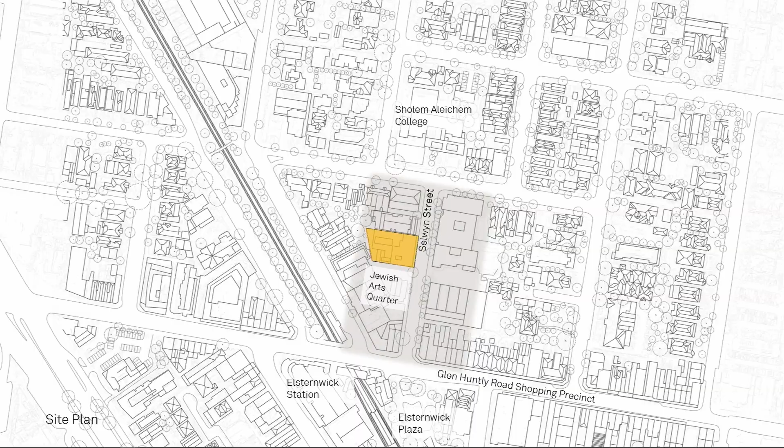The building is located within Glen Eira Council's cultural precinct, with Selwyn Street soon to be pedestrianised into a public space. The project has undergone a lengthy funding, design and approvals process before starting construction in 2020, and will be open to the public mid this year.

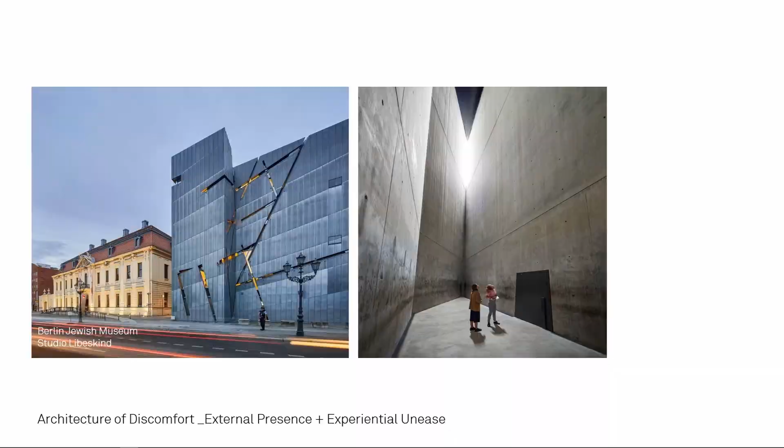Since project inception, we have considered the position of the MHM in the context of international approaches. For instance, Studio Libeskind's Jewish Museum Berlin is remarkable for its foreboding presence and experiential unease for the works. But what does it mean to build a Holocaust museum in an Australian context?

We decided that the appropriate response here is to provide a humane building that enables the survivors, their descendants, and the museum content to speak of the unspeakable, rather than the architects or architecture.

The Holocaust Museum holds a union of opposites: grief and faith, loss and hope, adversity and survival, solitude and fellowship. The architecture articulates these tensions between opposites in the creation of spatial ones: compression and relief, silence and vitality, openness and concealment. Mass is dissolved to let in the light.

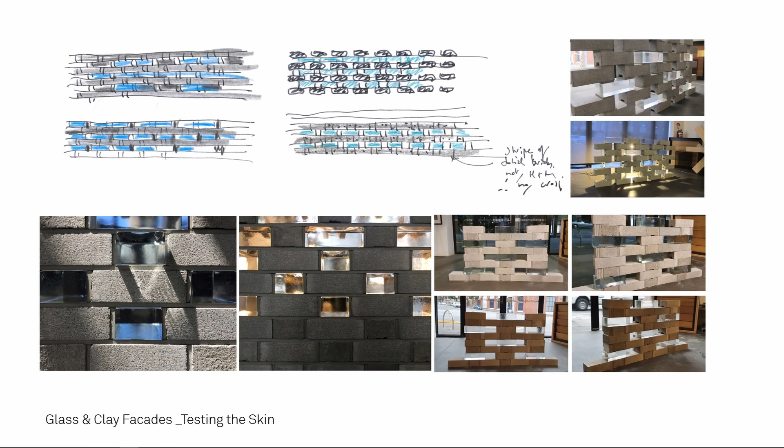The materiality of the museum facade is clay bricks and glass bricks woven together. This presents as another meeting of opposites: strong and gentle, robust and delicate, opaque and open.

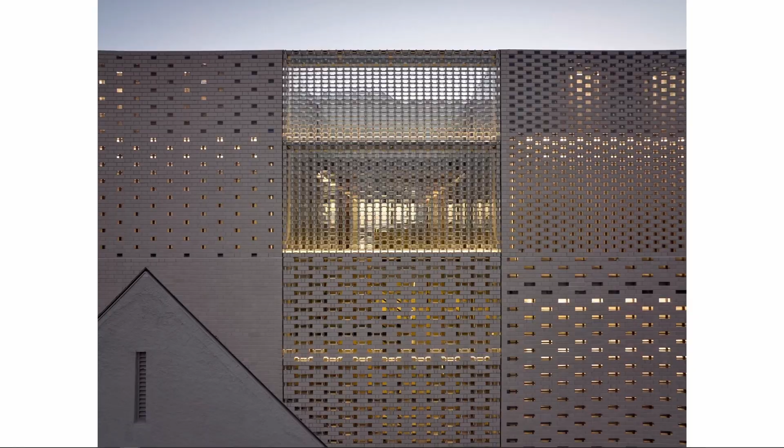We deliberately avoided a facade that reads as a war bunker. Instead, veiled light, the building facade holds both security and visibility in tension. The facades provide passersby with glimpses of heritage, trees and light.

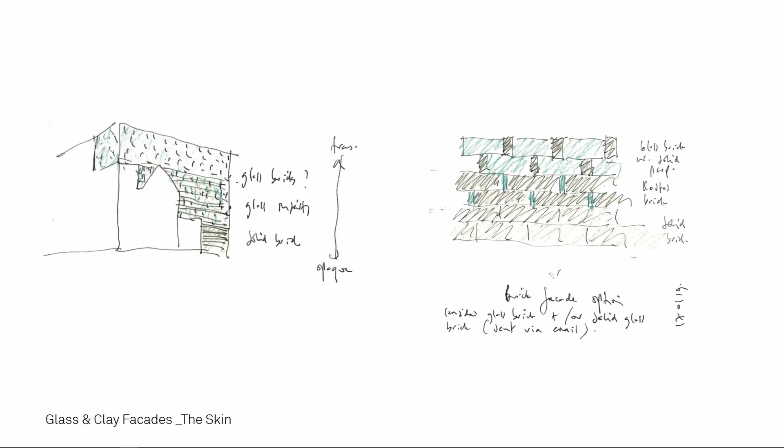Central to the mission of the MHM is illumination through education, to shed light on history. Clay and glass gradate from a resilient and secure ground floor to a top level for staff, where those engaging with traumatic histories daily are provided with the most access to light and views. Functions are mapped across the facade, expressed by their need or not for natural light.

Clay and glass interweave across the building face. There is an association here with the tapestries of Anni Albers, who was at the Bauhaus until it was closed by the Nazis in 1933.

Kristallnacht, night of broken glass, is when the fragility of glazed facades became synonymous with the pogrom itself.

Can or should architecture be deployed to speak of the Holocaust? For many, the Holocaust remains outside of representation. We have considered associations, but have left them subtle, pluralistic, and open-ended.

Beautiful tapestries and traumatic destruction, fragility and resilience all coexist.

The museum interior provides a series of reconnections back to the suburban landscape, the weather, light and sky. Windows and skylights bring people back from the trauma landscapes of Europe to their local situation. Views and natural light provide physical orientation in response to the emotional disorientation caused by the museum's contents.

A small birch forest has been planted as a gesture towards life and the cycle of the seasons. Birch trees lent their name to the Auschwitz-Birkenau camp, and as such here they may represent both life and death.

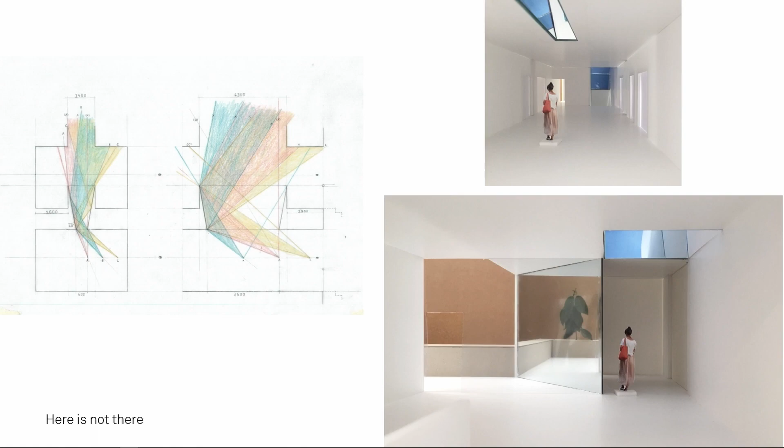Mirror has been deployed throughout the interior as another material of contradictions. They disorientate spatially while simultaneously reconnecting visitors with the sun and clouds. It is used to reflect the sky deep into the interior, confronting building visitors with their own reflection and the unexpected reflection of others.

The Jewish Holocaust Museum was founded by survivors in 1984 in the 1918 heritage building to the south, and further expanded in 1999 with a new addition by SGB Architects. Almost four decades ago, a new layer of cultural significance was added to the heritage building with its transformation into the institution it still houses today.

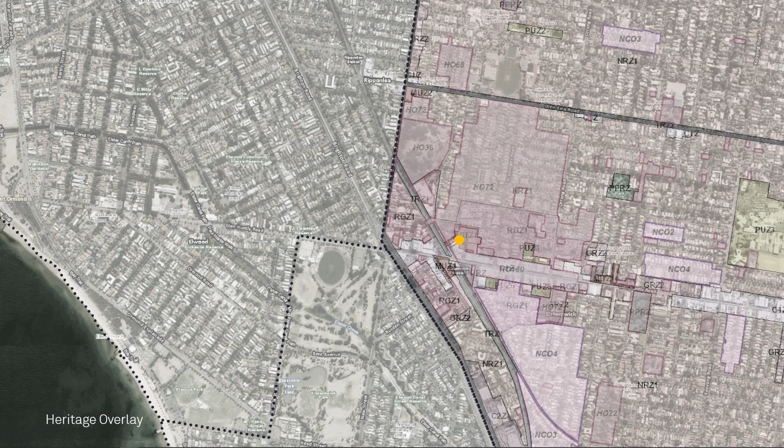The success of the museum over so many years is a testament to the incredible effort of the hundreds of survivors who voluntarily gave so much time and energy to ensure their message would be heard. Their legacy lives on in every corner of the museum.

The role of the museum as a cultural repository is reinforced by embedding the original heritage building within its new facade and treating it as an important artifact of the museum.

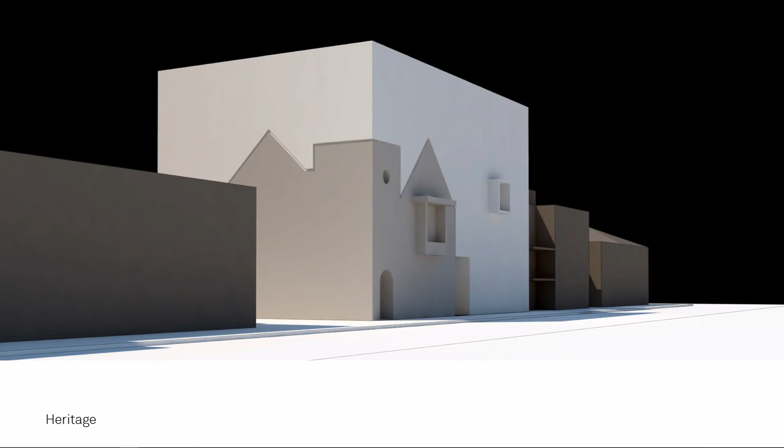Integrated with the brickwork facade of the new building, it is inseparable from and essential to the museum's cultural heritage, linking the past and the future.

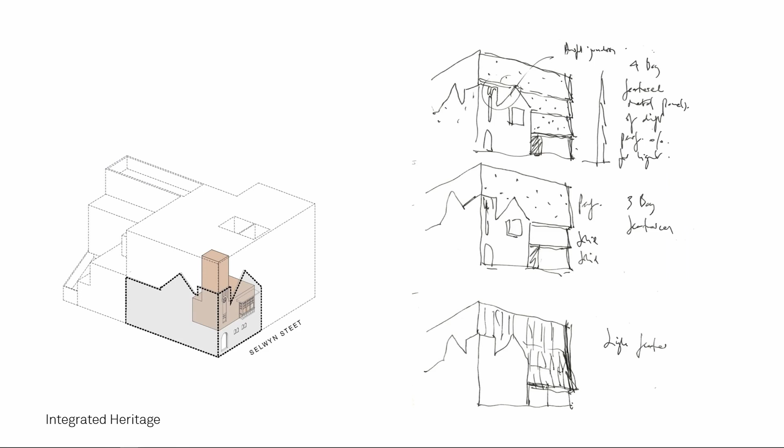The old and new facades come together to present a strong civic form to the street. The distinctive corner turret of the early building remains a defining feature of the streetscape.

Internally, its significance is reinforced through its transformation into a dramatic three-story lightway that illuminates a memorial space, arguably the symbolic heart of the museum, in which lives lost during the Holocaust are remembered.

At night, the top corner of the turret illuminates from within and shines as a beacon of hope.

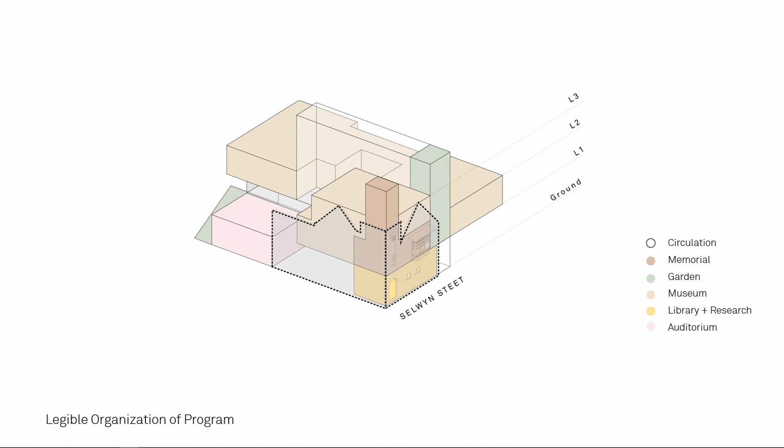The new five-story facility accommodates a complex program, all integral to the function of the museum. At ground floor, the entry opens into a generous foyer with clear view through to the memorial garden at the back, library and research center behind the existing facade, and two auditoriums.

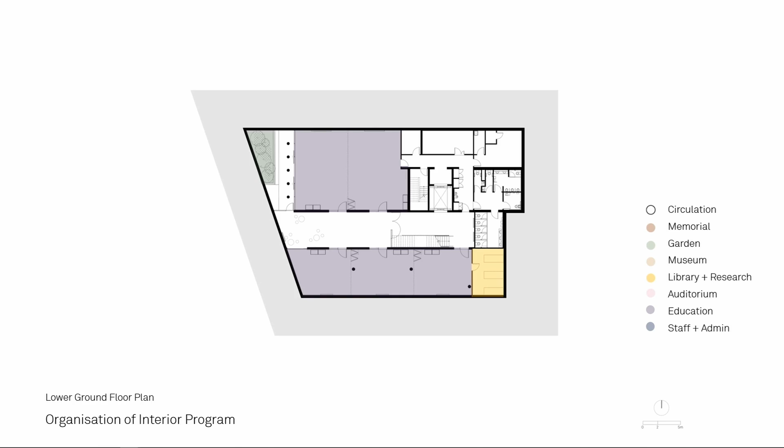In the basement, the circulation spine is repeated, as well as on all levels, to provide clear orientation and views. Educational space is on this level.

On level one, we have museum on each side and the memorial behind the heritage facade. On level two, children's museum to the south, research and admin space to the north. Level three houses staff and administrative space and offers long views.

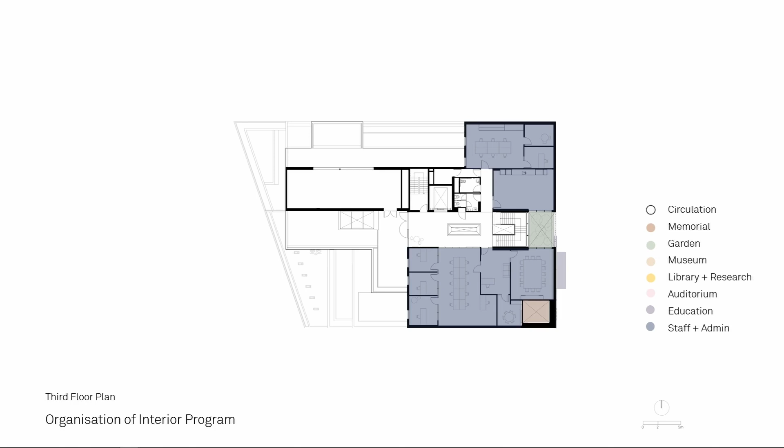A walk around the building in the Selwyn Street context. The entry, which is secure but allows direct view to the inside. The entry foyer with direct views to the memorial garden at the rear.

One palette of material, local timber, was selected to provide a human feel. It feels warm and makes visitors receptive, open to learn.

The memorial garden with the Andrew Rogers sculpture and the eternal flame.

In the library, the former solid door is replaced with a large window, and the existing stained glass windows are reinstated. Museum entry, change of atmosphere with weather, time of the day, time of the season.

The museum presents to the context as secure yet suitably transparent, contemplative, respectful, but also life-affirming. The architecture aims to render visible not only the trauma of the Holocaust, but importantly the survival of the Jewish people.